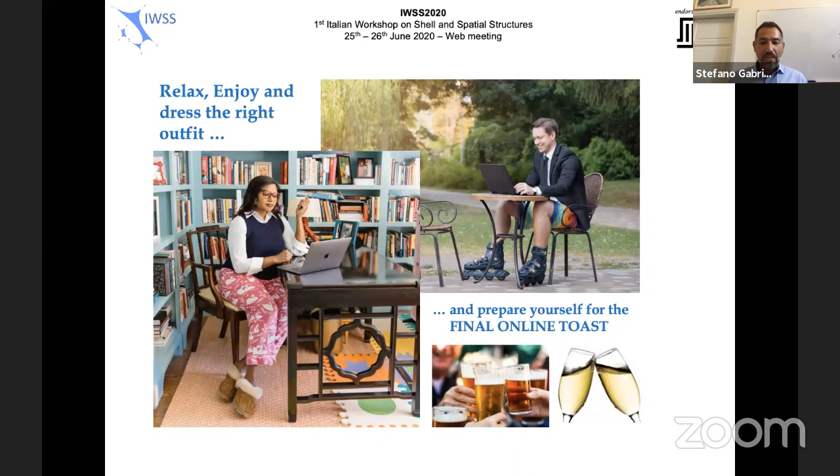Thank you so much, Stefano, for introducing the birth of our ideas and our goals so clearly. Like the best adventure stories that normally start with 'once upon a time' in a dark period, also in our case the IWSS began in a very difficult moment, I think - a period of crisis for our country and for the whole world itself: the COVID pandemic, of course.

Personally, I still remember the first online connection during the early lockdown phase. It was not clear how long the silence around us would last. At that day, it seemed inevitable to cancel the meetings completely. Unexpectedly, we decided to face the situation, and we thought that the best way to make ourselves useful to our society was to continue to do our duty in the best way.

We rethought the entire workshop through an online tool, reinterpreting the workshop with this new idea. We tried to bear the many negative sides of the situation through the possibility of developing the only true positive condition: the possibility to increase inclusiveness.

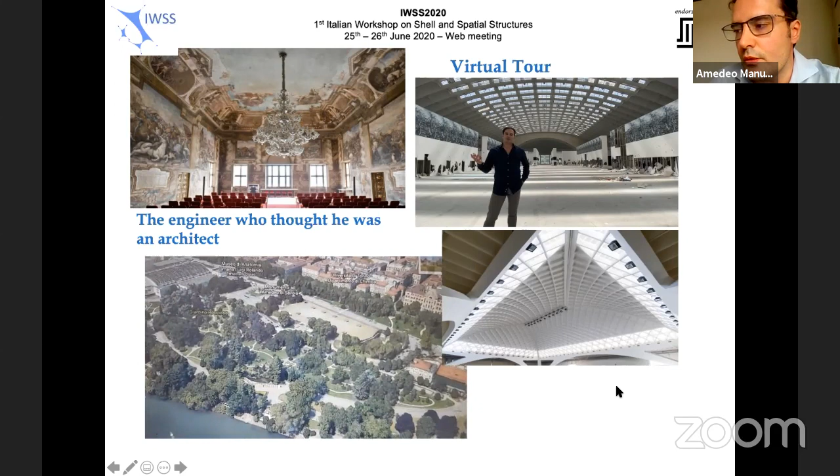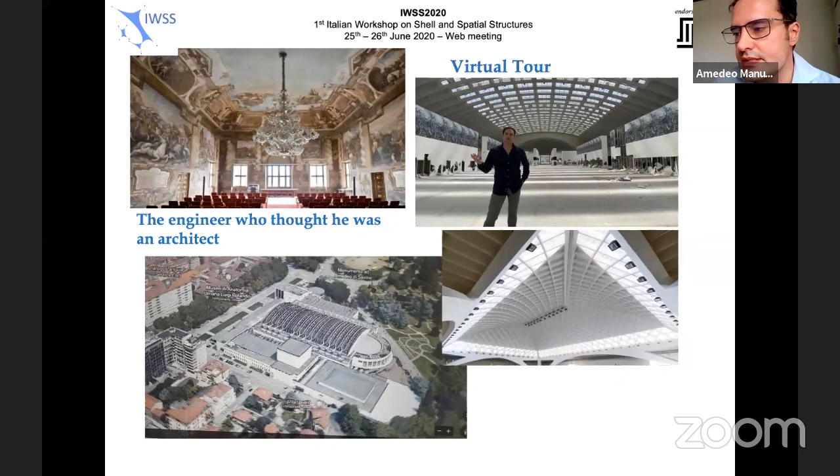Just ahead a short distance, you can see Riccardo Morandi's pavilion. Pavilion 5 was built in an underground hall and consists of a vault without intermediate support, made of thin prestressed concrete structures. Finally, we come to the main structure of the Torino Esposizioni center, built in the 50s by Pierluigi Nervi, one of the most important architectures in the city. This structure, comprising the wonderful pavilions B and C, is the subject of a specific virtual tour that you can find on the website, which I invite you to watch.

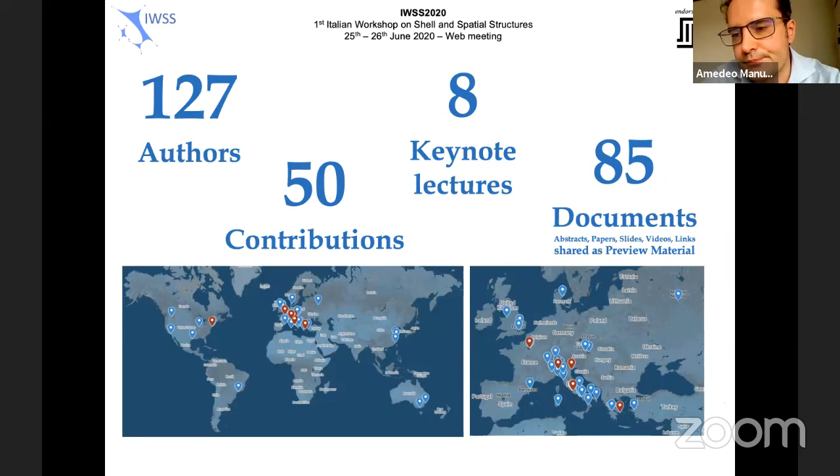In January, we were planning this workshop without any clue on what would happen in the next months. We were imagining a small workshop with less than 20 contributions and just 4 invited keynote lecturers. The lockdown forced us to move the workshop online, and this gave us the opportunity to enlarge the size of the event. With our great surprise, the number of contributions has more than doubled with respect to our expectations. Also, it has been much easier for us to invite prominent personalities involved in the design of shell and spatial structures from all over the world.

We have authors from almost every continent. Of course, we miss Africa and Antarctica. Perhaps we have no chance with Antarctica, but we can certainly work harder to include Africa in the next future.

We also had the idea of inviting authors to contribute both with abstract and additional preview material in the form of short papers, commented slides, or videos, in order to shorten the online session without limiting the amount of information they decide to share with the audience. This preview material is now collected in a specific page of our website. I invite all of you to take a look at these files.

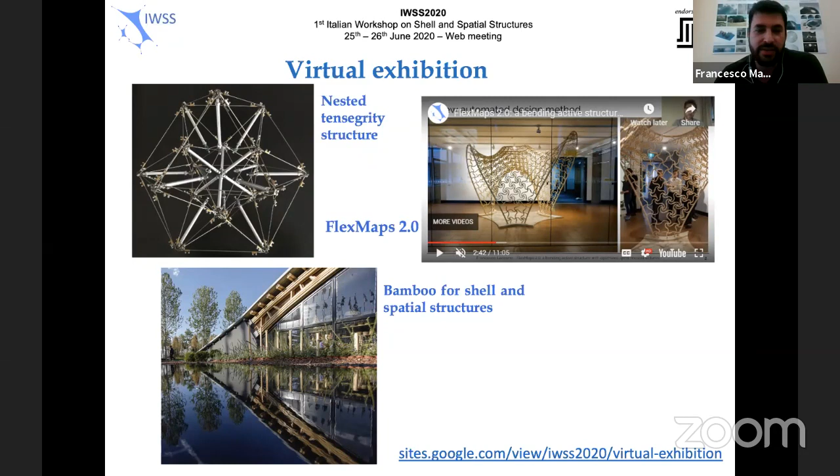So the technical program, the entire program of the workshop, includes many interesting lectures regarding the analysis, designs, and construction of shell and spatial structures. We set up 8 sessions of about 90 minutes each, 2 in the morning and 2 in the afternoon. Each session will start with a keynote lecture and will continue with a variable number of regular talks.

The only exception is the session on Friday evening, the last session, that will have a keynote lecture at the end. Breaks between sessions will be used to gather all lecturers for the next session and to allow the chairman to verify that all speakers are ready to talk. So I invite all speakers to connect and talk to the chairman during these breaks.

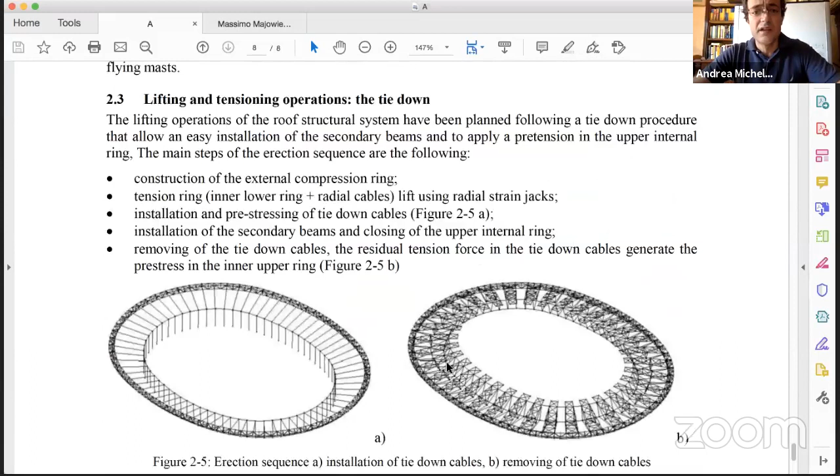Now I have some questions which we prepared to discuss with him. Professor, first I'll share the screen and show one of the documents you provided. This is about the Olympic Stadium and the Yaoundé Stadium in Africa. I would like to ask, what are the differences in cost and structural performance between these two stadiums?

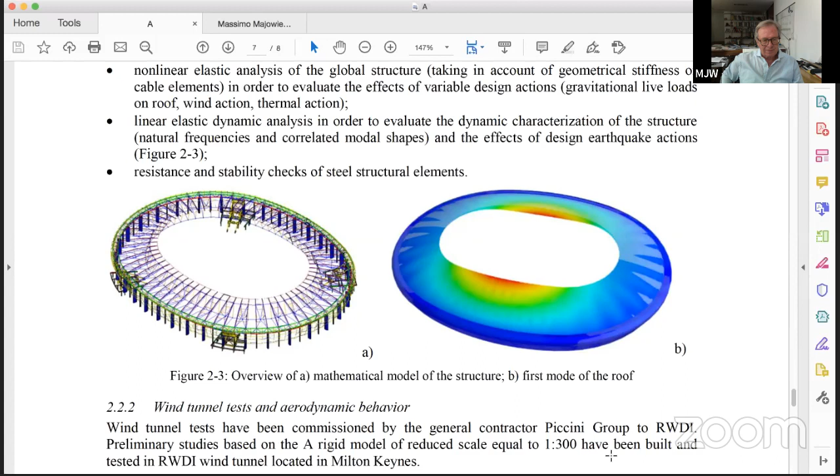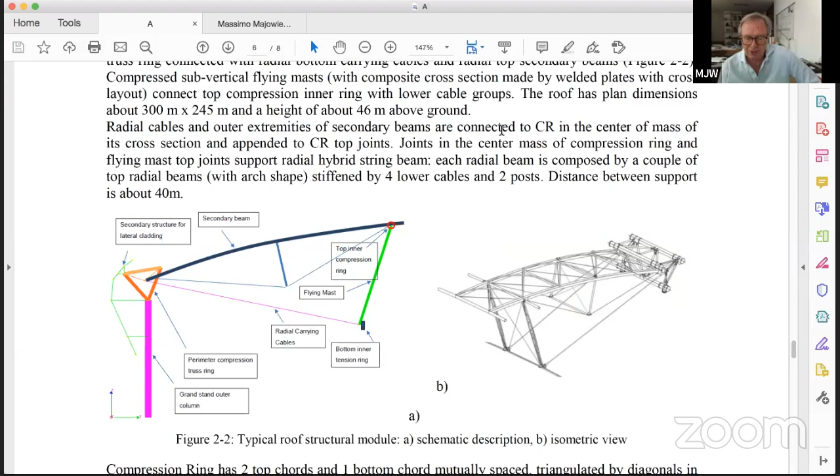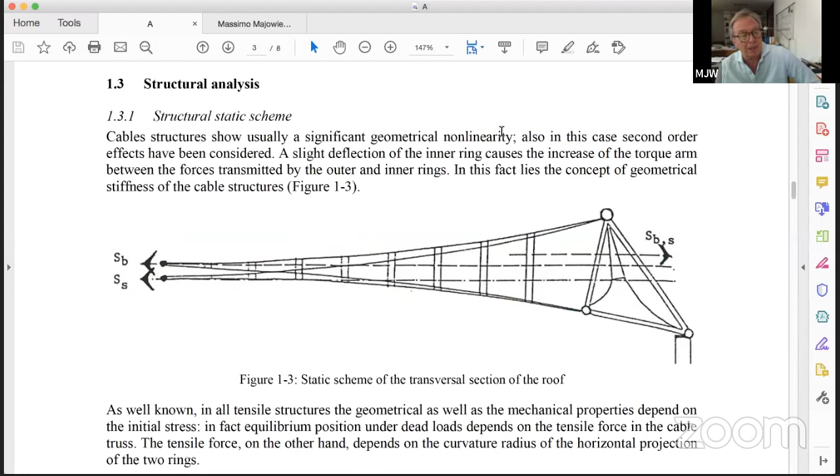Yes, well, thank you for the invitation. Good morning to everybody. The paper you are looking at on the screen—I took the opportunity to make a parallel in time, about 30 years' difference, between the Olympic Stadium and the Yaoundé Stadium in Cameroon. I also took the opportunity to present this at the first Italian conference on shell structures, because the Olympic Stadium—maybe nobody knows—was the first of the family of wide-span spoke wheel roof covering stadiums in the world. I then took the opportunity to present it in Boston, and I was very pleased to be awarded the first prize for this paper there.

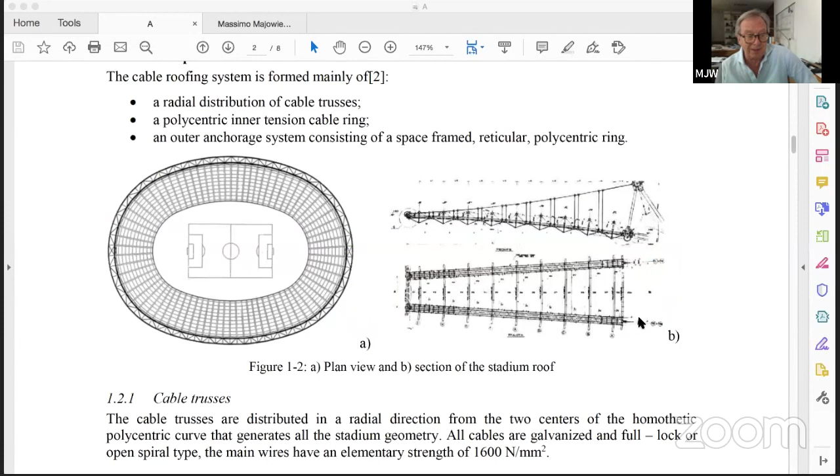I like to represent here in Italy, because this is an Italian construction that maybe was the starting point for many other constructions around the world. At that time I had a lot of real preoccupation, because I was very preoccupied about the dynamic behavior, and maybe this was the first time we made a roof of more than 300 meters with a hole in the middle. What would happen? Maybe something like Tacoma Bridge, etc.

I don't know where I found the courage at that time to do that, and it seems to me it was another person, not me, because it's uncorrelated in time. But anyway, the spoke wheel concept was very difficult, because it was supported vertically only by 12 columns. There were a lot of particular problems in such a construction, but we succeeded in doing that in 16 months, and still now I don't understand how we succeeded.

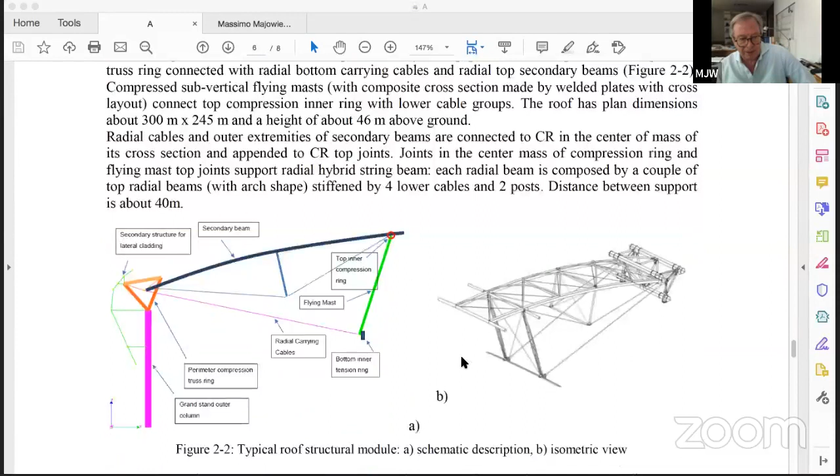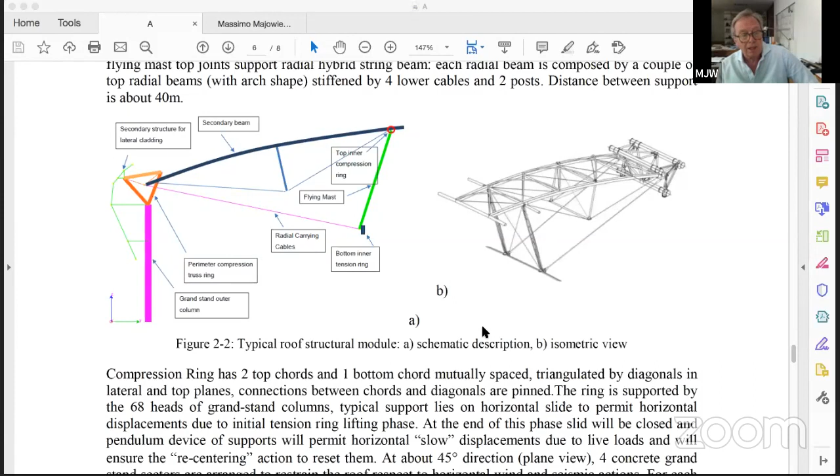Anyway, for Yaoundé Stadium, what is the new proposal? The new proposal is that we have a different way of erection, because the so-called big lift procedure used for the Olympic Stadium was much more simplified here, using the bearing cable. You see the radial carrying cables there, the red one, the violet one, and this is what we need, because the only thing we need to get the equilibrium is the angle of this carrying cable, which gives us the possibility to carry the weight of the secondary part up there, which is a hybrid steel structure supported by the flying mast, the green flying mast.

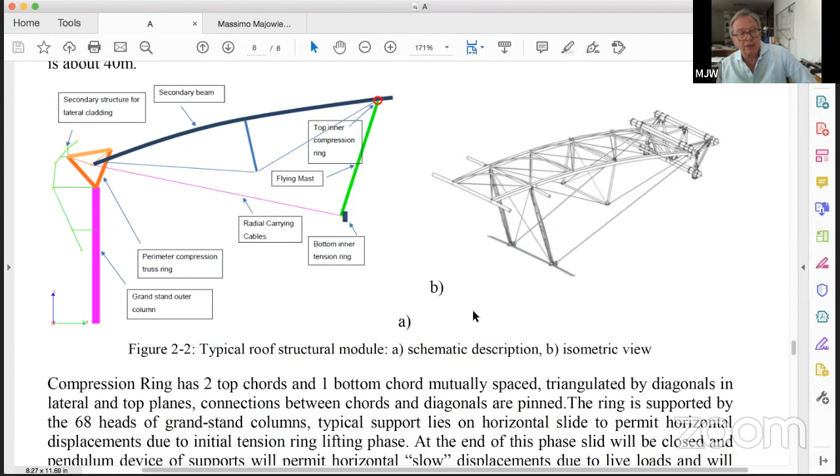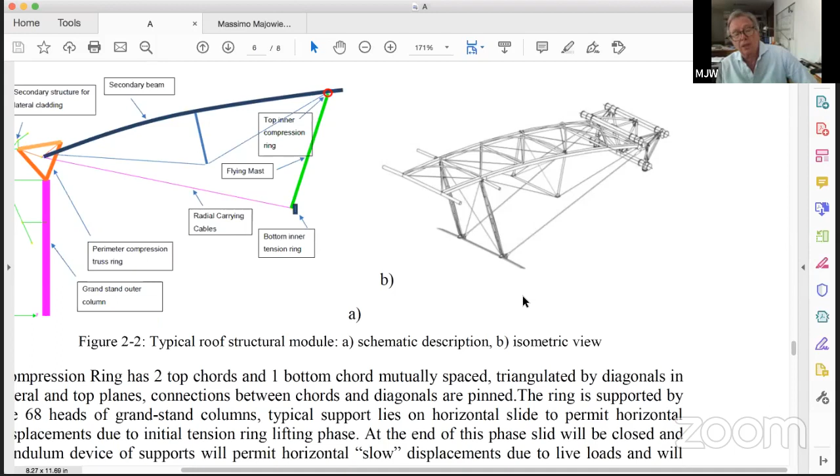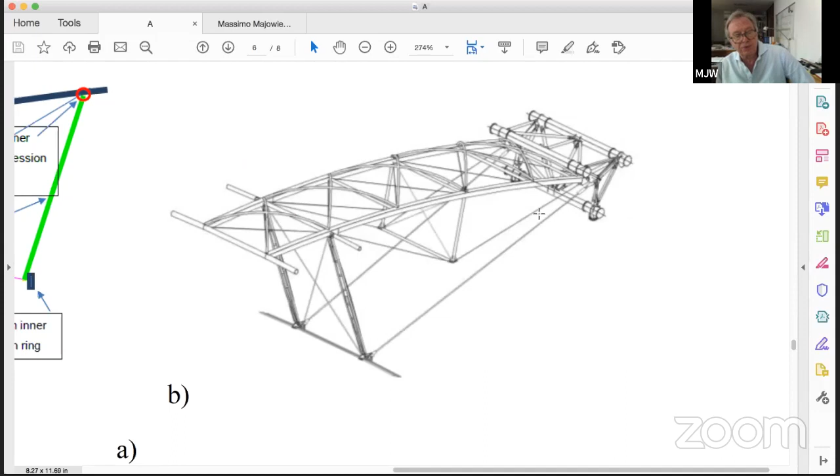That's all we need, and therefore we simplified the system for erection, because what you see on the right is the panel that has been erected all together with the membranes and so on, and this was much more easy, economic, and time-efficient on the building site. Also, there is very good safety, because the carrying cable and the secondary part that you see is an arch of 3 hinges. So it's very adaptable to any kind of tolerance in the lifting and on the ground.

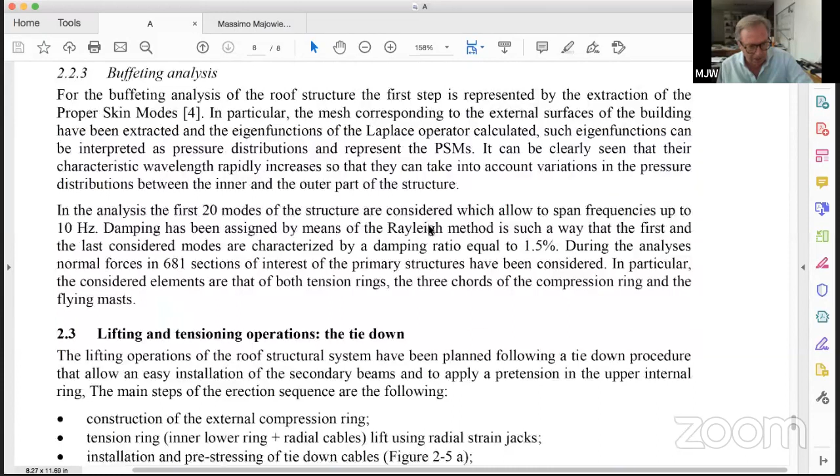What was possible to do? That was possible because we adopted the so-called tie-down system. The tie-down means that if, for instance, I place the panel on the tension ring, there were displacements of maybe 1 meter or more. In order to have a very easy erection, we used the tie-down system. You see an installation of a tie-down cable. The tie-down cables have an initial force that is more or less the dead weight, the permanent loads of the secondary structure. Then the support stays in the right place and is not movable, because the tie-down force is bigger than the permanent loads. With this easy way of construction, we achieved success in time and in cost.

That's all for this. Thank you.

So let me just quickly go to the second question. This is maybe something more personal, probably. Can you tell us something about your contacts during your career with Frei Otto?

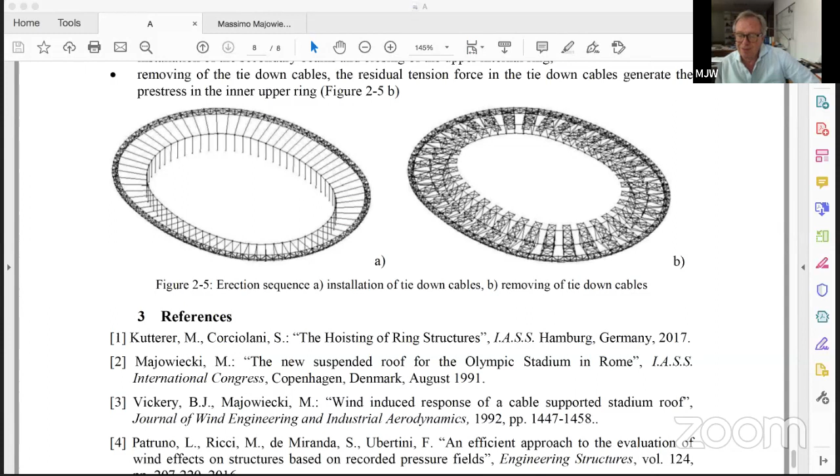Frei Otto — more or less, I was a student at that time, because I had the opportunity to meet Frei Otto at a conference in Stuttgart. At that time I was preparing a doctoral thesis about lightweight structures, and I had a photo of the Olympic Games '72. I didn't know that at that time he had been removed from the design team. I presented my photo like a student, and he said he would sign it, but reversed, because he said he didn't like it anymore. This was my only contact with Frei Otto.

A special problem — you remind me of this. Okay. So I thank you for telling us this story.

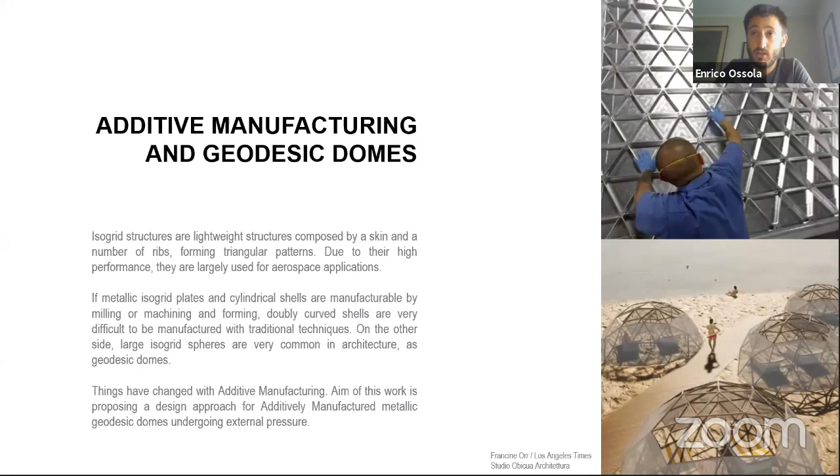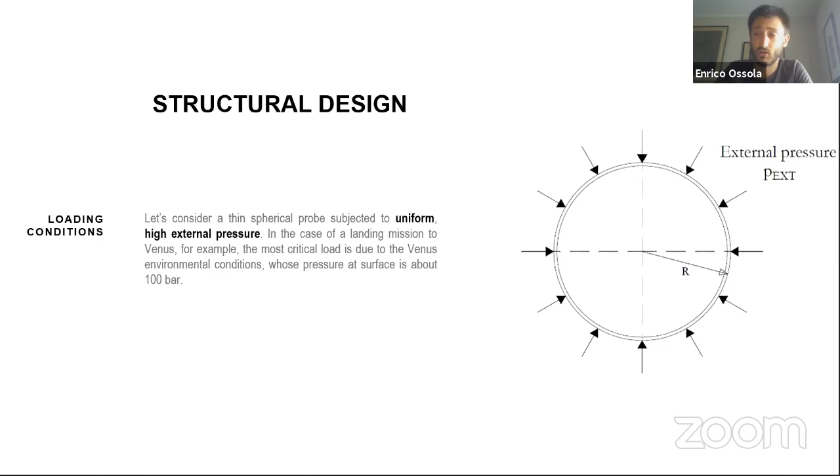So the problem is pretty simple: it's basically a hemisphere subjected to uniform high external pressure, and two failure modes are possible, yielding or buckling. The most critical one is maybe buckling, and some analytical formulations are given in literature for estimating the buckling critical pressure, but they need to be modified by using some empirical factors, the knockdown factor KF, which somehow takes into consideration the effects of imperfections. This KF is pretty variable, and the recommended value for industrial application is about 30%, so it's pretty low.

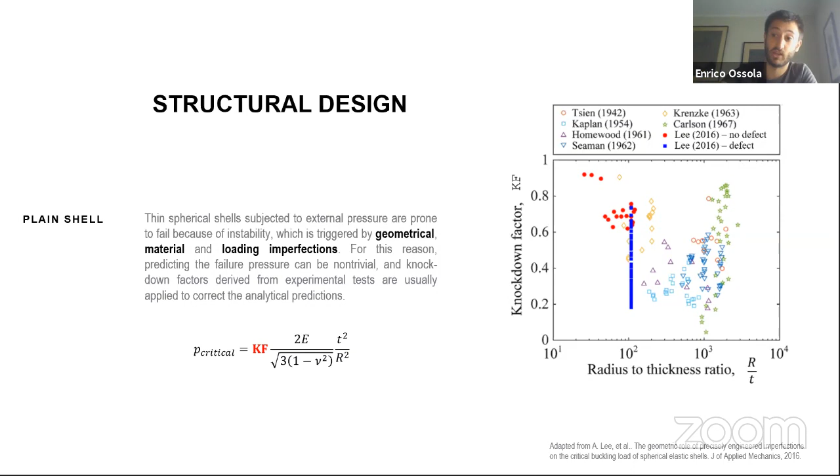Stiffened shells could probably result in some more robust designs and be less sensitive to imperfections. This is the isogrid layout with the main isogrid parameters. Basically, with some analytical formulas it's possible to predict the stress state of a spherical isogrid shell, and again two failure modes are possible, yielding and buckling.

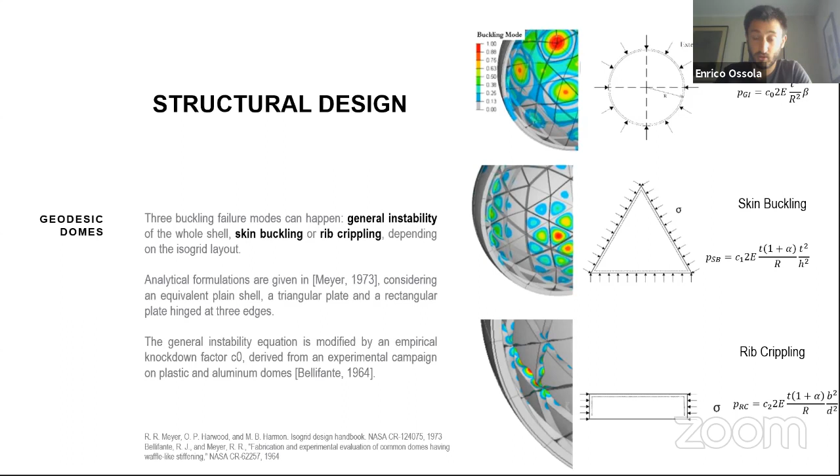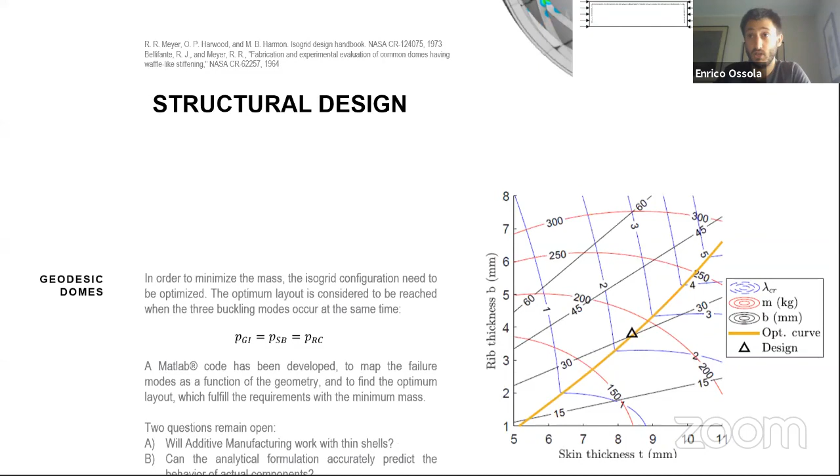However, for buckling, the situation is a bit different in respect to plain shells, because we can have the general instability of the whole sphere or some local failure modes which are skin buckling and rib crippling. For example, in skin buckling, when the skin is really thin, it can buckle, just one single pocket can buckle, or when the ribs are very thin and very tall, they can cripple. So the problem is finding the optimum isogrid configuration. We started from a paper from the 70s, and we wrote MATLAB code to optimize the isogrid configuration. The optimum is assumed to be reached when the three buckling modes take place at the same time.

But two questions remained open: will additive manufacturing actually work for thin shells, and what will be the actual behavior of isogrid hemispheres? So we decided to go testing.

This is the path we followed. We designed 20 centimeter hemispheres with the analytical tool we wrote, then refined the geometry to improve manufacturability. We performed numerical simulations, then fabricated three isogrid hemispheres and one plain hemisphere made of Ti-6-4 using additive manufacturing. Finally, we tested the shells under hydrostatic external pressure, increasing the pressure of the chamber up to the failure of the shell.

So here, for example, this is one of the shells failing.

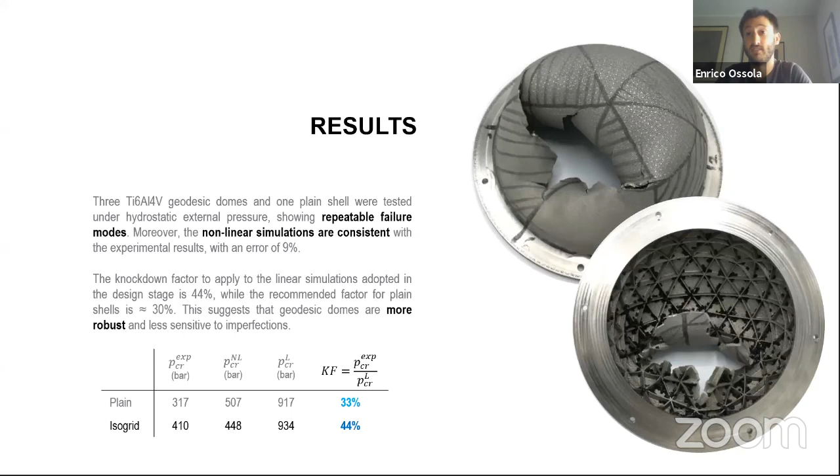Results: the three isogrid shells failed at about the same pressure, and nonlinear simulations were found to be consistent with the experimental results. What is really interesting is the knockdown factor. For the plain shell, it's very similar to the one suggested by literature for traditionally manufactured shells. For the isogrid, the knockdown factor is 44%, significantly higher than for the plain shells. This means the isogrid shells may be less sensitive to imperfections than the plain ones.

In conclusion, we showed that additive manufacturing is a way to fabricate shells for probes for extreme environments, and the isogrid layout can improve the mechanical behavior of these shells. Future activities are needed to estimate the mass savings related to the adoption of this internal grid.

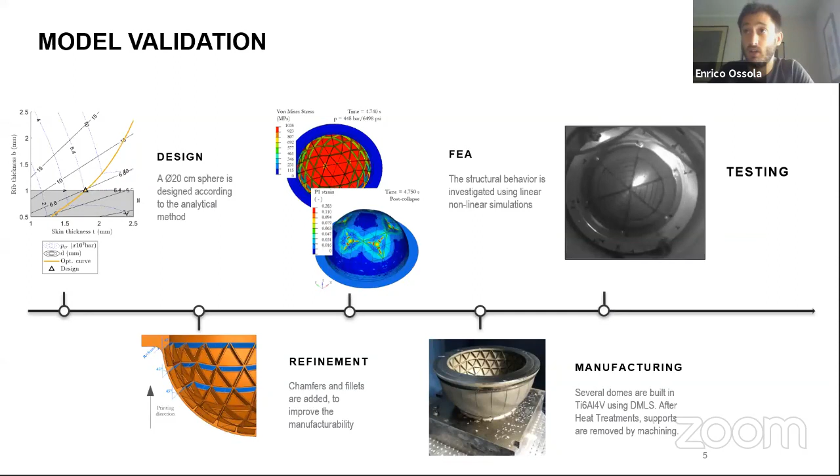One question is whether there are other architectures for the reinforcement - for example, a three-dimensional geometry for a metamaterial, or maybe a hierarchical geometry. We started with this isogrid geometry because it's well known for aerospace applications, but we're also thinking about a sandwich structure with two skins and some lattice or architected material in between, though there are manufacturing challenges because it's more complex.

Also, I guess it's harder to have an evolutionary algorithm for optimization - this is not easy. Yeah, we didn't use any genetic or evolutionary algorithm, just some analytical formulations, because this is just a preliminary study, so we needed a fast tool to design the isogrid layouts. But it's a good idea for maybe checking and validating the models.

Last question, about corrosion, because additive manufacturing suffers from corrosion. The surface of Venus is a very corrosive environment, but some coatings are possible - we can coat the titanium shells with some ceramic material, for example, to improve corrosion resistance.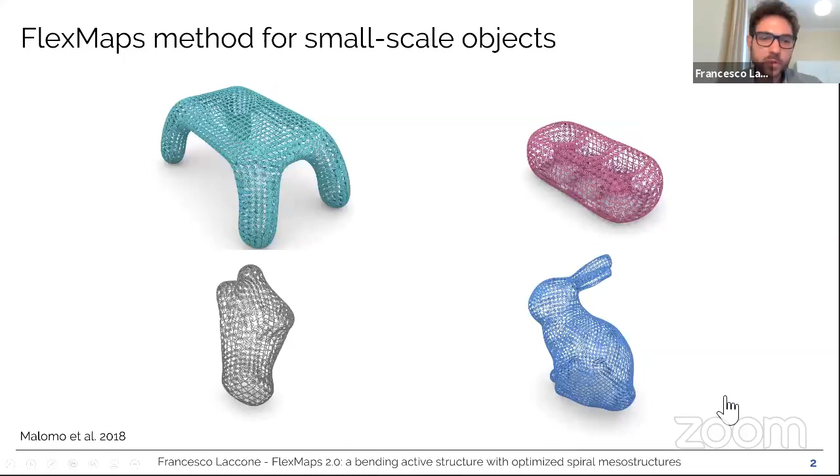The work I'm going to present builds on computer graphics research that aims to realize small-scale objects out of flat patches, like this one you see in the video. This approach discretizes a generic object into deformable mesostructures in the shape of a spiral.

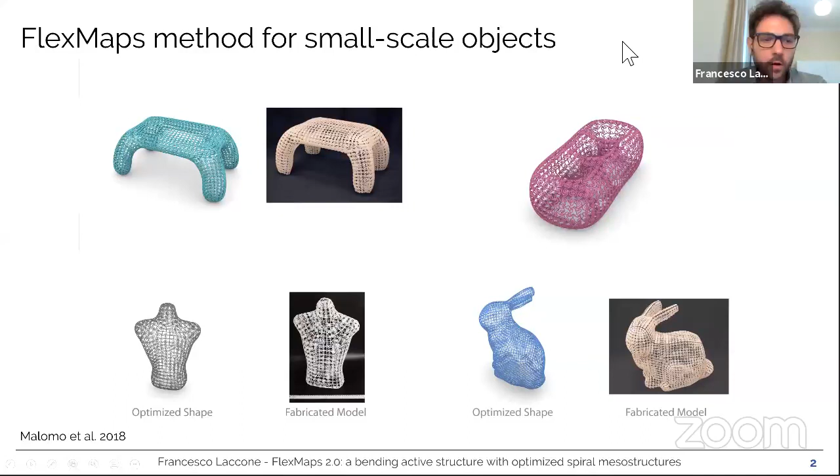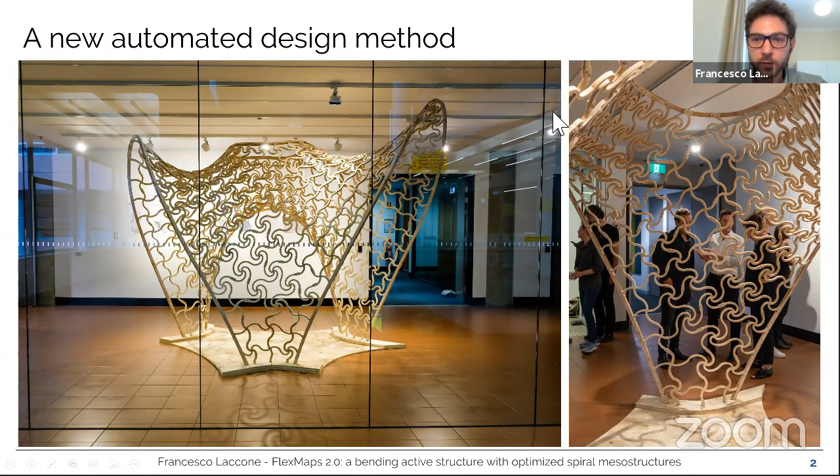We tested it in a demonstrator project realized at the School of Architecture of the University of Technology of Sydney. I will briefly recount the main steps of this methodology. So what is the concept? The object reaches its final shape once all panels or patches are individually bent and then tied together.

So the panels are initially flat and then are bent by hand, and also appropriate conditions are applied. To connect the patches together, we used a key connector that has an interlocking shape, so the pieces are locked by friction, mostly by friction, and then we use 2 bolts to avoid any other relative movement.

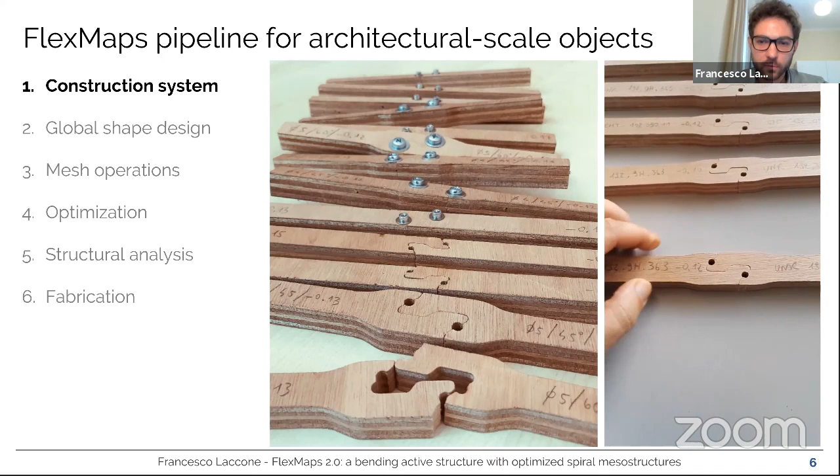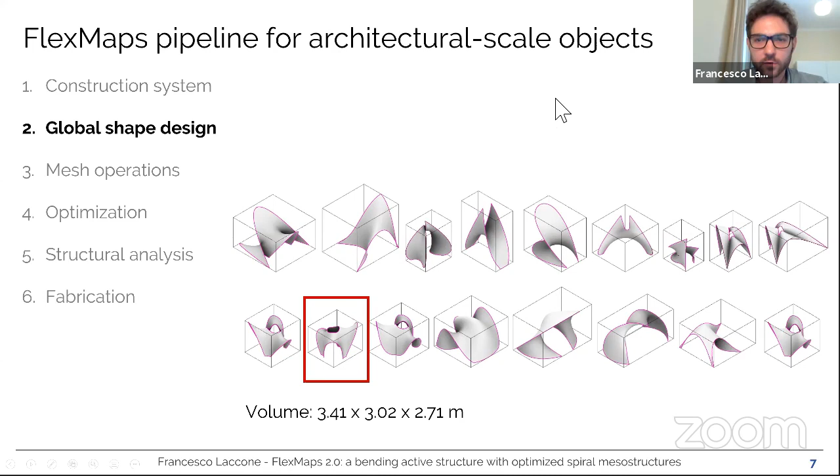We quadrangulate the target shape with quads that are as regular as possible and aligned with the boundaries. The quadrangulation is fundamental since each quad embeds one spiral, so the quad defines the size of the spiral. Then we use the FlexMaps algorithm to tune the spirals to a certain stiffness, such that at equilibrium they are as close as possible to the target shape.

The stiffness of the spiral is governed by only 2 geometrical parameters, which are the spiral thickness and the spiral twist. We can obtain locally different stiffness parameters only by altering the geometry, so we have no need to work on the material.

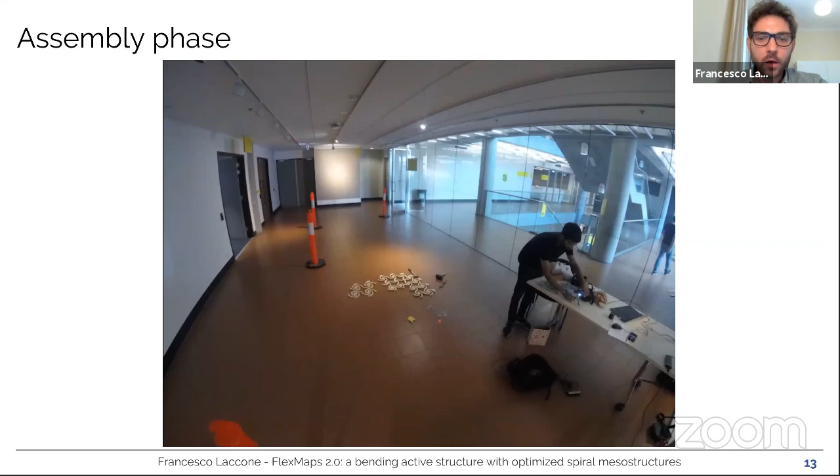This is a short video of the assembly of the structure. It took about 3 days, manually bending one patch at a time and connecting them together.

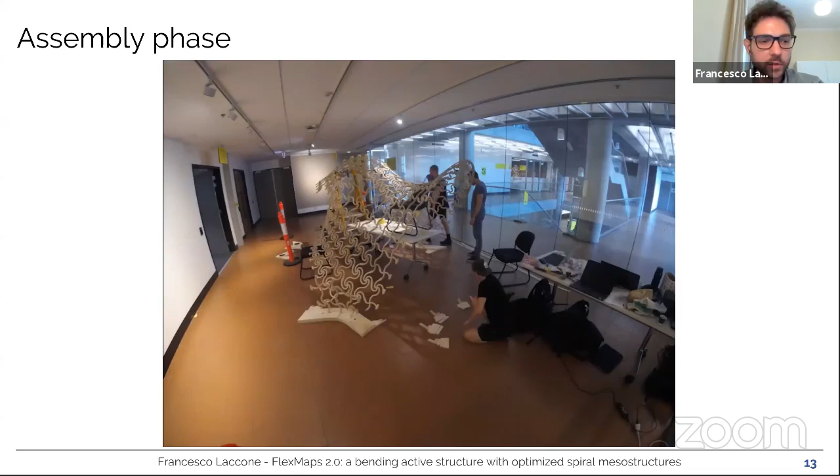We also dedicated attention to the design of the floor, which I'm not talking about, but this is not merely aesthetic, it also has to provide resistance to the thrust force and to the bending.

Just to conclude, we can state that the FlexMaps approach can definitely be used at the architectural scale, and this demonstrator is our validation for the method. This method is very straightforward, and the whole process from the conceptual design to the assembled structure took about 1 month. But just consider that the fabrication took about 1 working week, and there are also some design aspects that were not automated. Thank you for your attention.

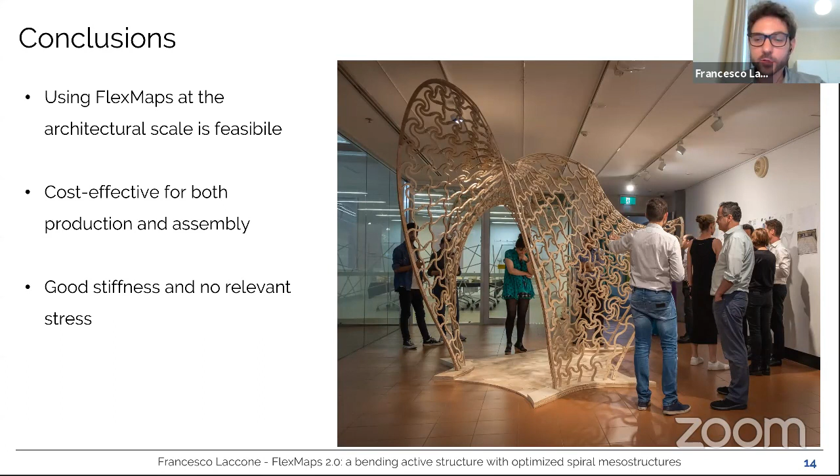Thank you very much, Francesco. I see that Amedeo Manuelo has a question. Please go ahead. Yes, thank you very much, Mr. Chairman. I want to ask, what about the loading configuration that you used during the numerical simulation? Which loading did you put onto the structure?

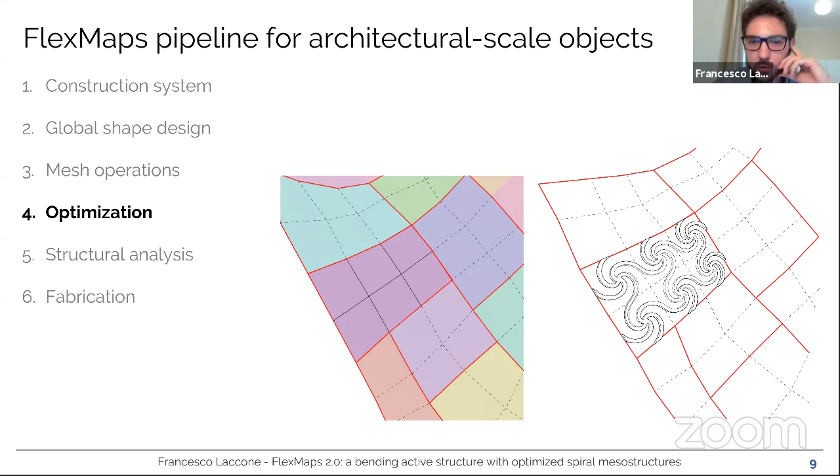Yes, thank you for your question. You mean in the FEM model or during the optimization? Okay, because in the optimization, we just compute the equilibrium of the structure under the dead load, the gravity load.

In the FEM model, we developed a 2-phase model. In the first one, the panels are individually bent, starting from a flat position, as close as possible to the supposed target shape. In a second phase, we connected the patches together, so we applied a kind of bonding condition between the patches. We release the stress, so the stress redistributes on the surface, and then we applied gravity and other loading. In this particular case, this was an indoor installation, so we just applied gravity load and some safety load on the boundary due to the event of impact of people.

Yeah, thank you so much. I don't see any other request in the chat. Stefano Gabriele is reminding us that this contribution is in our virtual exhibition, and so there is time for one more question, and I would like to ask how much the construction procedure can affect the stresses in the elements.

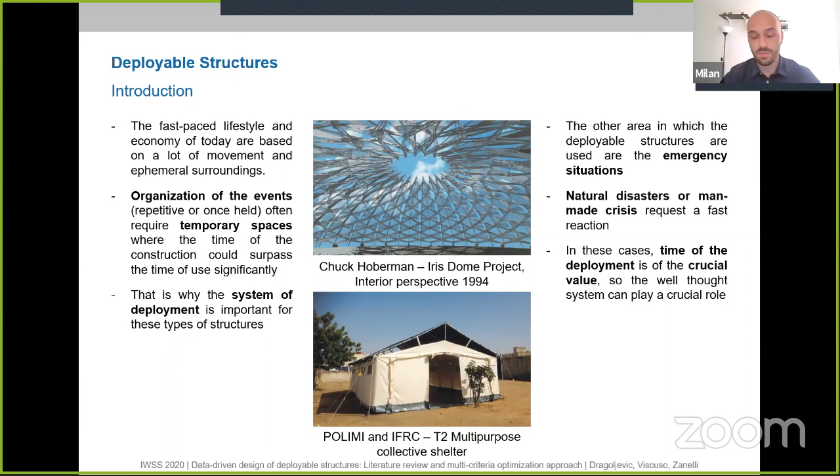As you're all mostly familiar, the two areas in which deployable structures are used the most are events, so organization of temporary exhibitions, concerts, etc. And the other one is emergency situations, when you also need to deploy the structure very fast. So in order to reach this point where you can deploy the structure very fast, there are a couple of requirements for the structure, like minimum self-weight, high energy efficiency in use, etc.

So we try to find the data-driven approach that could pick up all these requirements and use data to apply them even more than is currently the case in structures.

To start the research, we started from understanding the classifications and divisions that exist among deployable structures. Here you can see the timeline of the development, and you can also see that starting from the 21st century, the deployable structures were examined and classified more. The first classification was in 1987, and then the next one in the 21st century.

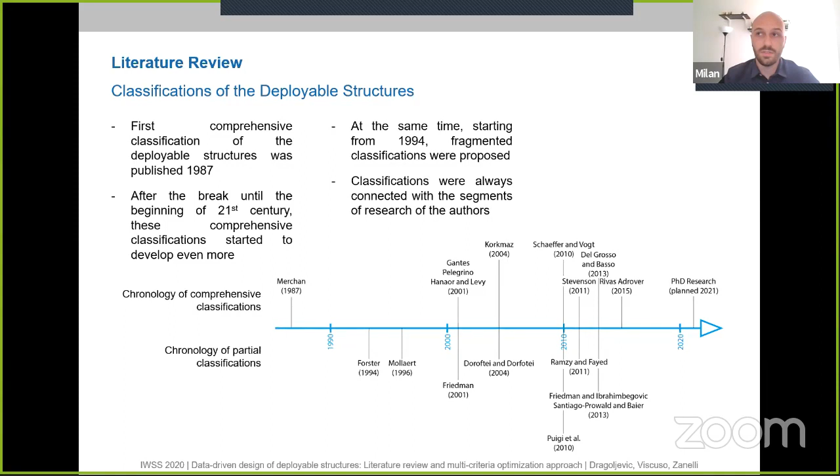So now I'll focus on them, and I can maybe anticipate a bit - the focus of our interest was on scissor structures. So we tried to understand in different types of classifications how they classify the scissor structures.

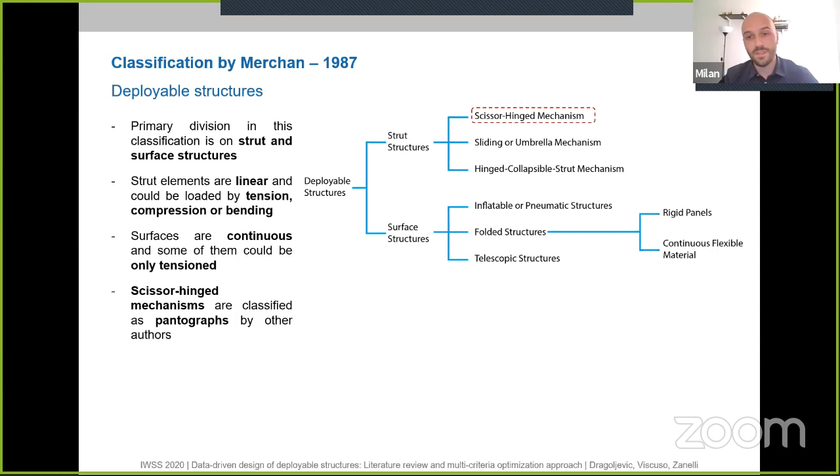So they were all here as a part of the strut structures. Then in the classification by Gantes, they were under the earth-based deployable structure, meaning their self-weight is an important part of their load. And also by Pellegrino, under the structural mechanisms.

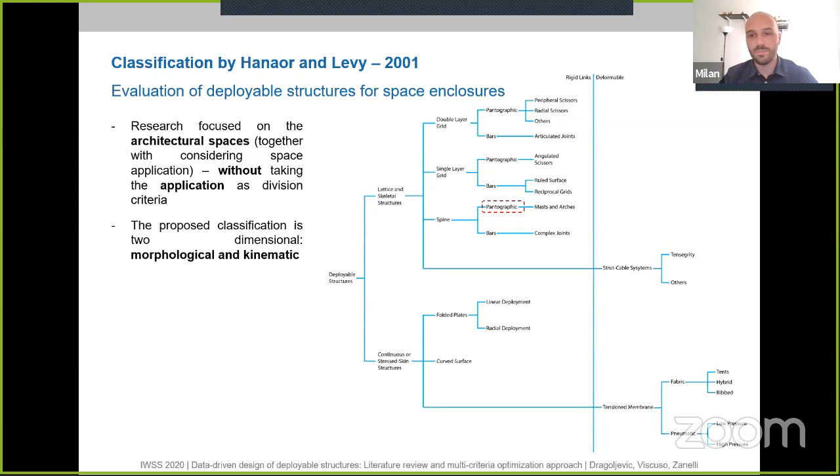This is one of the most important classifications. It is the most referenced one. So Hanaor and Levy used it as a part of the rigid links and skeletal structure.

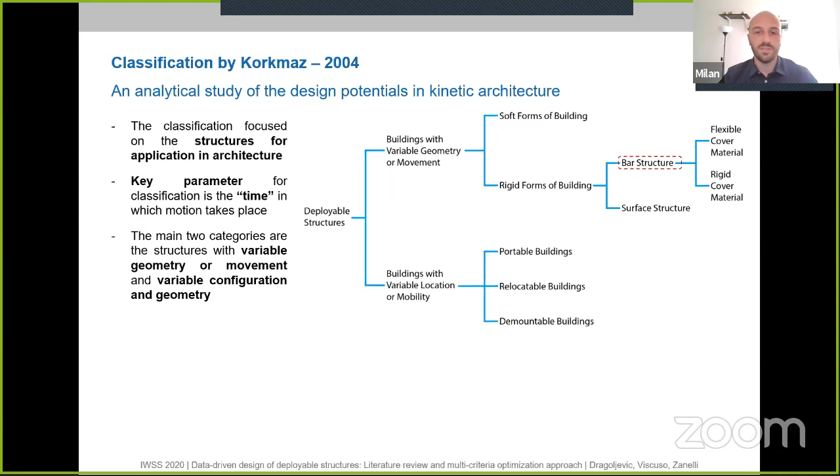Korkmaz in 2004, this was the division based on application in architecture, so it goes under buildings with variable geometry. Schaeffer and Vogt in 2010, under rigid materials.

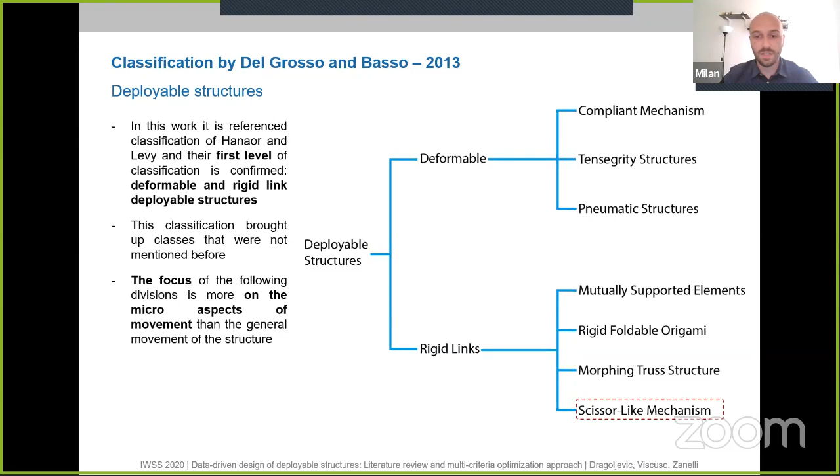And by Del Grosso and Basso, also under rigid links, this is connected to the work of Hanaor and Levy. And in the end, by Rivas-Adrover, it's a type of construction that starts from a structural component, and then the whole structure is designed, let's say, bottom to top.

So to summarize, scissor structures are also interesting because they have a linear element and their self-weight and use of material is quite efficient. So you don't have any additional elements that are not loaded. All the tubes or poles are loaded and either compressed or in tension.

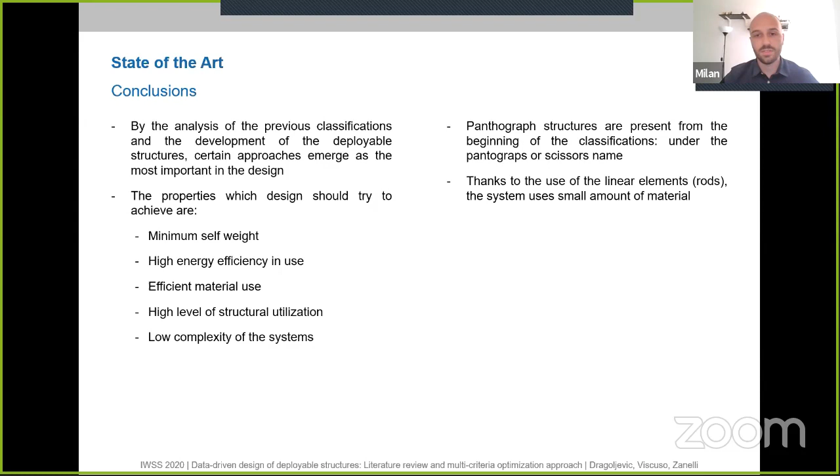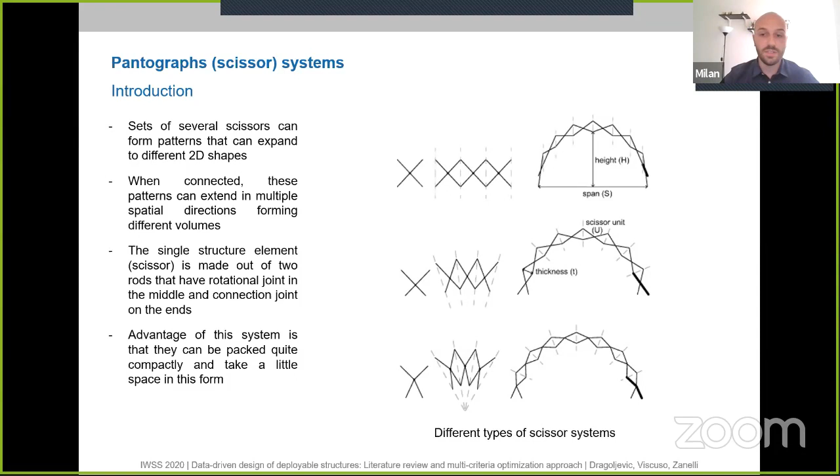So that's why it was interesting to see how far we can push this utilization of the elements and of the materials. So to sum up the possibilities of the movement, you can have a linear movement, you can have a radial, circular, etc.

And in the end, we focused on the dome as a 3D structure that can cover the most space compared to, let's say, vaults or single curvature elements. And we developed this parametric 3D model in Grasshopper with two elements: a scissor system that are in fact tubes, and a fabric cover that are membranes, but thin membranes.

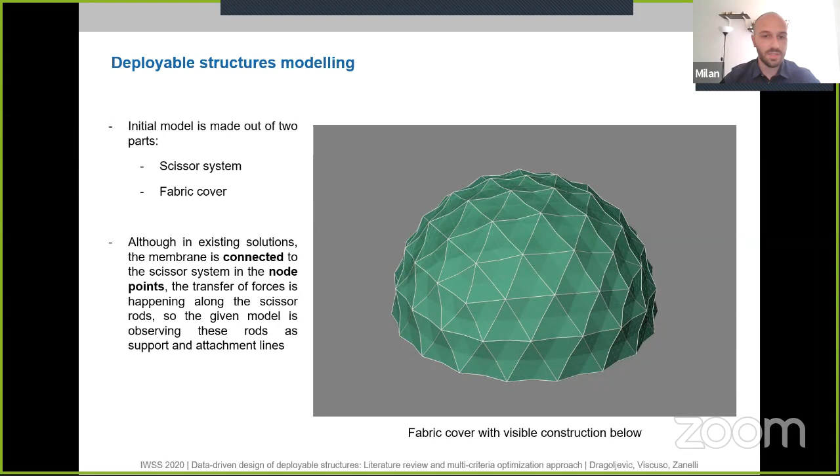Here you can see the model as a whole, and here you can see the generation of the dome. This is also controlled parametrically, diameter and frequency. Frequency is in fact the number of divisions.

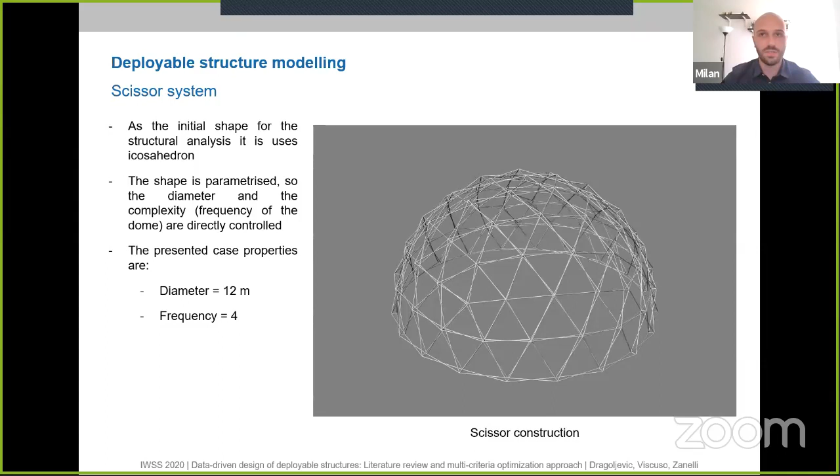So the design can now be guided and supported by this algorithm that allows you to generate the structures almost instantly. And these are the materials that we used for our simulations: steel Q235B and PVC extruded material as a membrane, with initial dimensions of poles with diameter of 3 centimeters, thickness of 0.5, and membrane thickness of 0.45.

This created a problem because, as you know, for Karamba you have two types of algorithms for calculations. For the membrane, it's important to use a large deformation algorithm, and for the poles, it's used the first order theory algorithm.

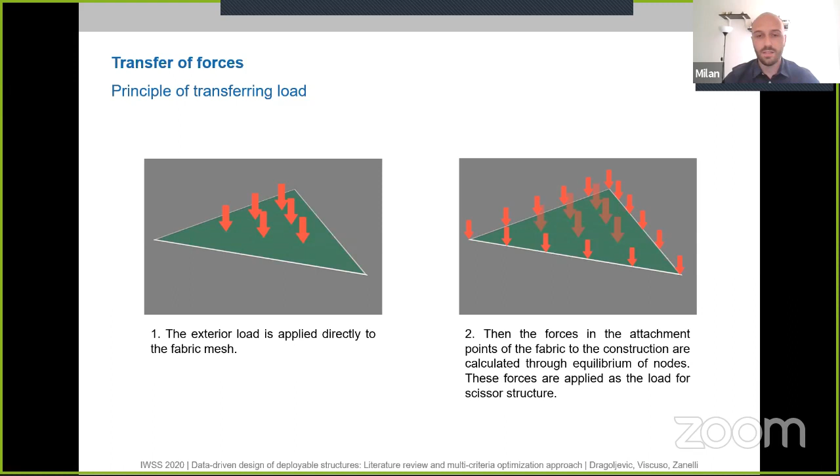It was challenging to find a way to create the nodes where the load from the membrane is transferred to the poles, but we managed that using supports and understanding the load in the support points. We tested our structure on the snow load in Milan, which brought a maximum displacement of 45 centimeters on 12 meters of diameter, so not so much.

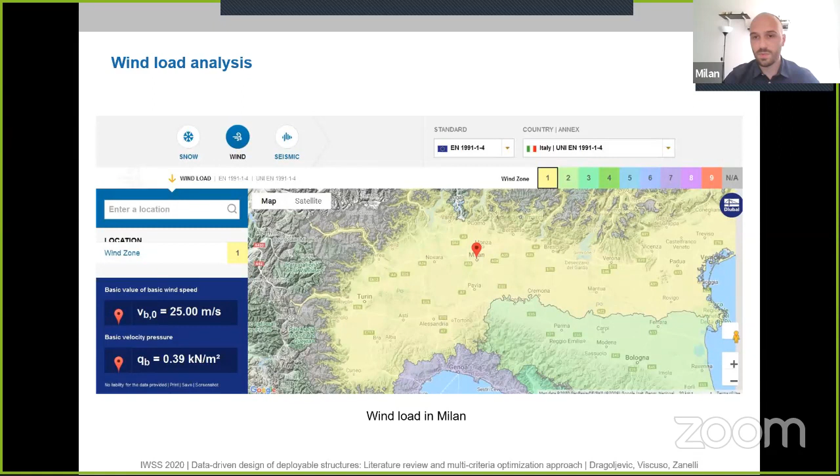We did the same analysis for the poles, and also for the wind load based on the Eurocode. You can see a displacement of just 6 centimeters. This is also the most important part for the decision maker: we managed to extract the maximum bending moment at the structure, which is 0.93 kilonewton meters, happening in the case of snow. We compared this to what the cross section of the poles can resist.

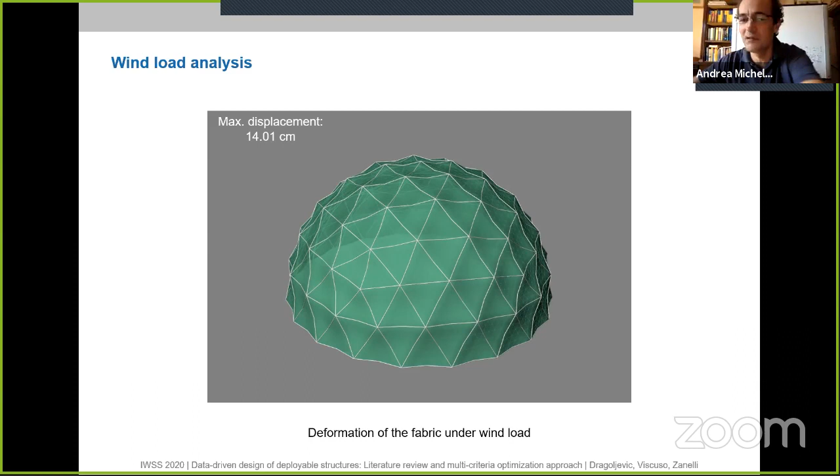It's interesting because it's also connected to our first talk, and here you have also a pre-stressed structure. The quick question is: did you do any analysis taking into account pre-stress and the possibility of buckling, or are you planning to do so? It looks very promising as a geometry and should be quite strong as a deployable structure.

Yes, that's connected with our further research, including the internal loads that exist in the structure before the external load of snow or wind. You mean internal actions, right? The pre-stress, yes. Bending active is also one field that could be interesting considering this internal pre-stress. And I guess you also need to do a buckling analysis, since maybe the pre-stress is too high and the structure suffers more — it should be a trade-off, probably.

There is Stefano Gabriele, and I will give one chance to Stefano Gabriele to ask a question. Thank you for your presentation, very interesting. I think that the tension in the membrane is a very important parameter for the global stability of this kind of structure. How do you think you will control this tension in the membrane in the real construction?

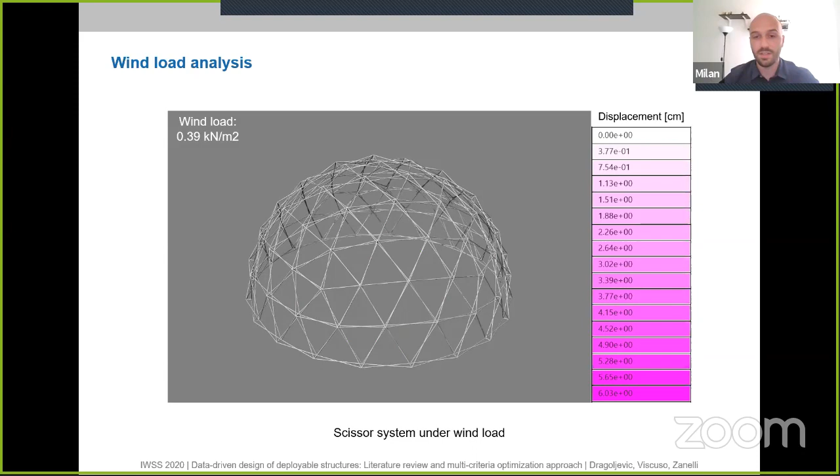Sorry, I didn't understand the tension in the membrane. So how to control it when you build the structure, how to impose the right pre-stress, how do you do it? Well, I guess we will also need to develop generative algorithms, or similar to this table, understanding what is acceptable and what is not. This algorithm helps because you can generate the maximum that the material can resist and compare it to the maximum generated in the structure, so maybe going in that direction.

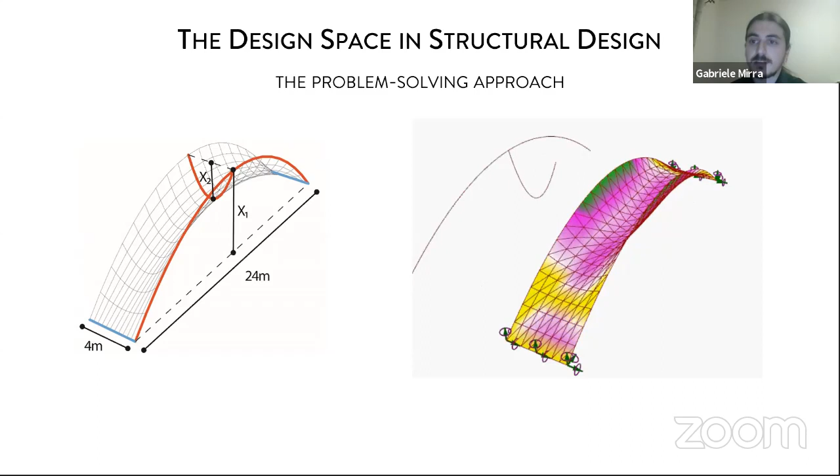In this presentation, I'm going to show you a different approach based on artificial intelligence. With AI, a computational model can learn the design variables from a dataset of design precedents and reuse such variables to construct a design space which contains a large variety of solutions.

When talking about artificial intelligence, we refer to a specific class of machine learning algorithms called artificial neural networks. These can process data to extract or generate visual features. Depending on the model architecture, these models can perform different tasks.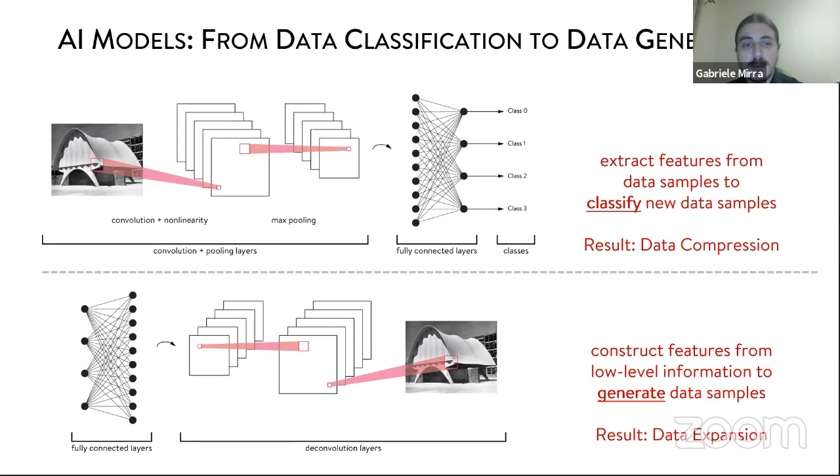The model chosen for this application is called a variational autoencoder. It combines both architectures to perform different tasks. The first part, named encoder, learns to extract design variables from a dataset of precedents and construct a latent space, considered here as the equivalent of a design space. The second part, named decoder, learns to decompress the information contained in these variables to generate new data samples.

This is an overview of the application I've developed. It starts with the development of a dataset to train the AI model. Then the AI model was trained on this dataset, and evaluation is done by analyzing the properties of the latent space. Finally, I applied this trained model to generate new designs.

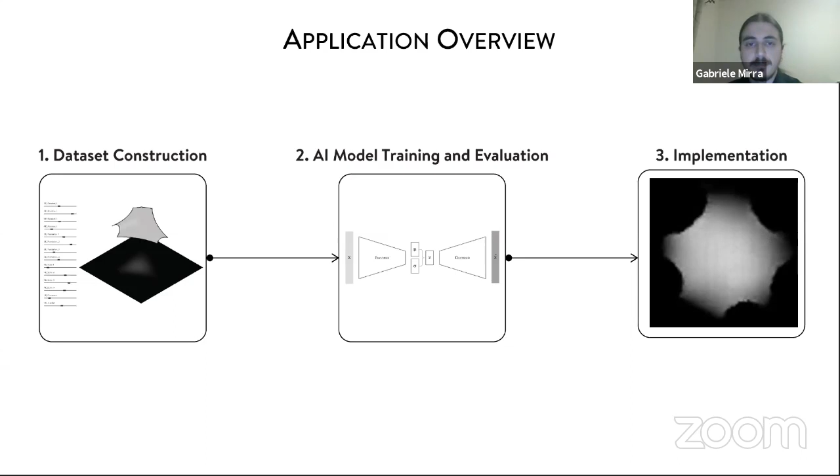The dataset was constructed through a parametric model. On the top left, you can see the design variables which were used to generate a design footprint. This was then fed into a dynamic relaxation algorithm to generate a 3D model of a potential shell structure design.

Finally, all the 3D models were converted into depth maps, which are bidimensional representations of the points or the height of the points lying on the surface of the 3D model. This is a format which is readable by existing neural network architectures.

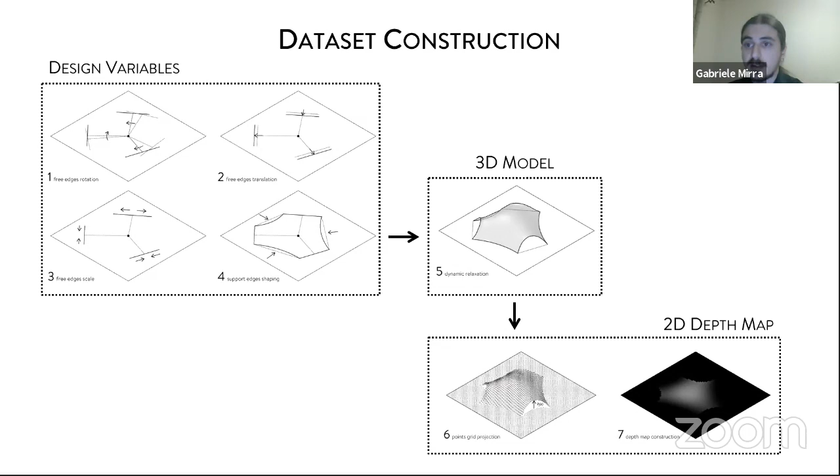In this animation, I show how this process was automated through a Grasshopper script, starting from a random combination of variables, the generation of a 3D model, and finally the conversion of the 3D model into a 2D depth map.

This is the result: 800 3D models represented as depth maps, divided into 3 categories, which are shells with 2, 3, or 4 openings.

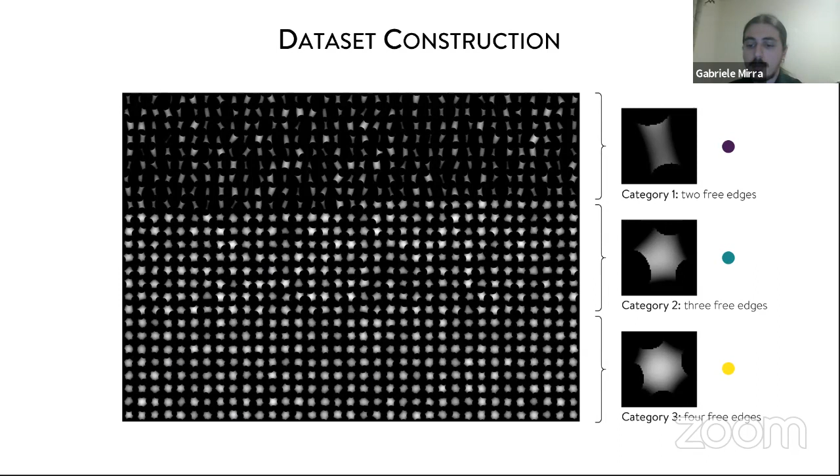Over several iterations, the model is able to extract increasingly more useful variables, and then reconstruct finer details of the input data samples. What's important to note is that besides reconstructing the input data, after training, the latent space can be sampled to generate new data samples.

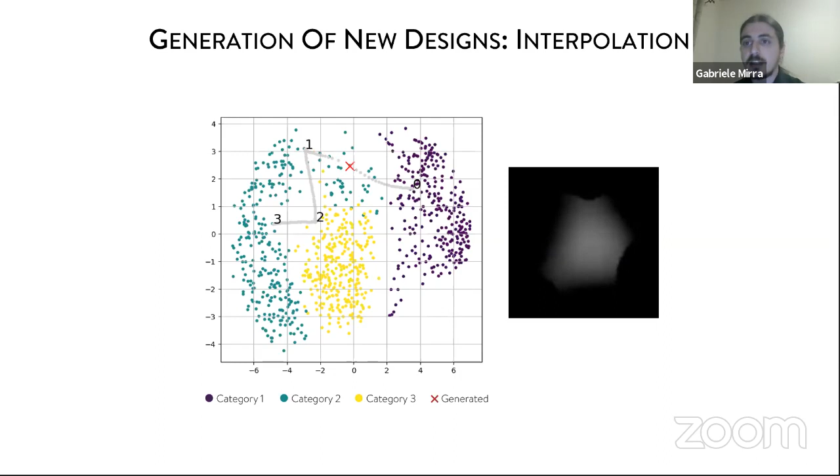In this animation, I show how the generation of new data samples can be performed with this model. On the left, you can see a bidimensional representation of the latent space with 4 numbers which identify the position in the latent space of 4 selected designs. The combination of variables representing these designs are linearly interpolated in the latent space to produce new combinations of variables. These are then fed into the decoder to generate new data, which are not part of the initial dataset.

This application demonstrates that the model is able to interpret information provided in a different form of representation, and it's also able to generate solutions which are considerably different from what it has been shown during the training process.

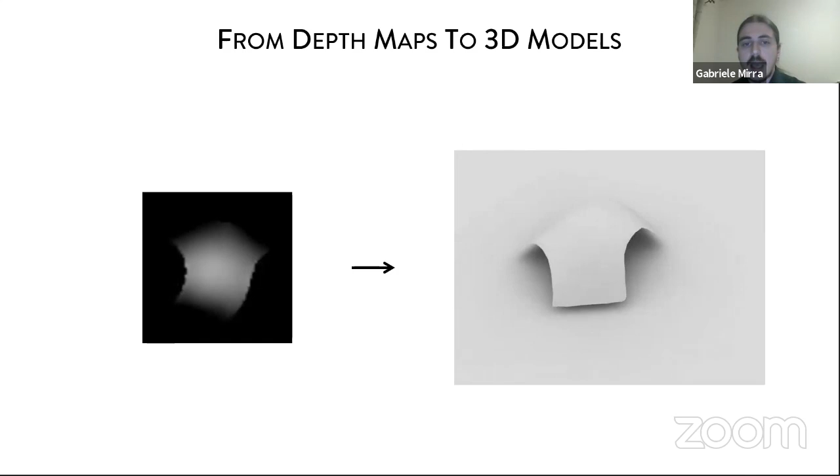In this slide, I want to point out that although the model can deal only with 2-dimensional images, it's pretty straightforward to convert a depth map back into a 3D model, and this conversion process can be performed easily with any CAD software.

As final remarks, I want to stress a few points. The first is that a variational autoencoder can potentially offer an alternative for the construction of design space, and this can help designers during the conceptual stages of the design process where considerations about performance are more relaxed. And a variational autoencoder constructed design space can also be explored with traditional optimization techniques by imposing some performance criteria.

Finally, for this application, I've just tested the model on an artificial dataset, which was constructed through a parametric model, but I've already successfully tested the same approach on a dataset of real shells and spatial structures. These results will be presented at the IASS 2020 conference. Thank you all for listening.